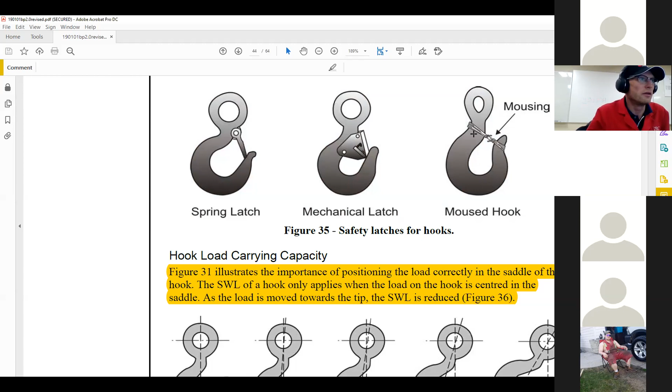Yeah, interesting. Yeah, sometimes necessity is the mother of all invention. It's a saying that they used to say, right? If you need to get something done, you figure out a way to do it.

So carrying capacity of hooks.

Oh, someone needs their microphone. I don't know who it is. Oh, there we go, it's gone. Thank you, whoever it was. Appreciate it.

If you're on headphones, it's probably not as bad because then it's not a speaker playing the sound and picking it up on the microphone. But yeah, if you're playing on your speakers or anything like that, if you leave yourself unmuted, then it'll start feedback and stuff like that.

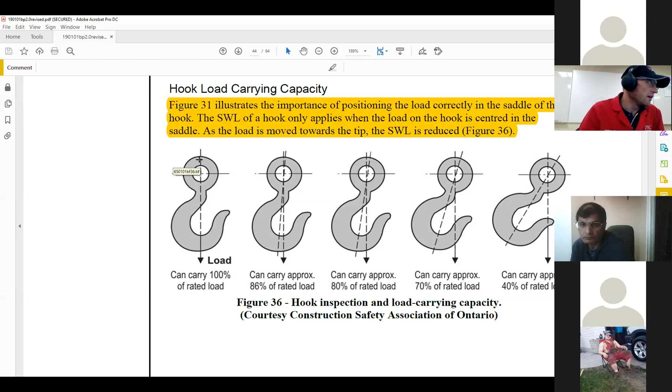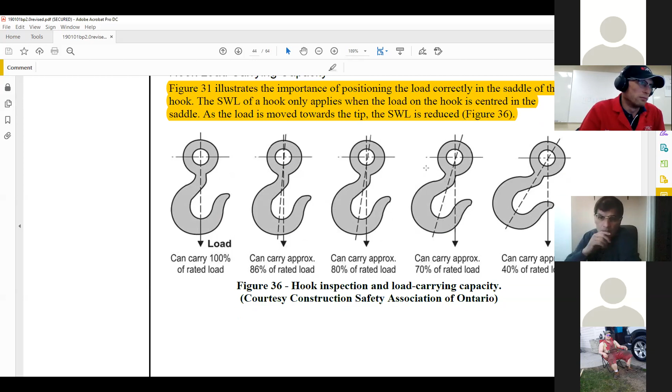Anyhow, so at the perfectly straight up and down where a hook is designed to be in its perfect world, it can carry 100% of the load. And just like our sling, as that angle starts to get smaller, or in this case, as you start to get any angle, we can say here's an angle forming right here. So as this angle gets larger, the carrying capacity of the hook drops quite significantly.

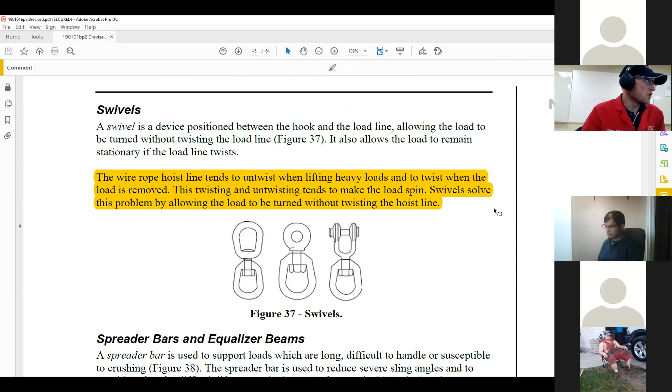When you were the person who works with the big cranes and stuff, did you have someone who was in charge of all the rigging and stuff like that? Me, a swamper. You were the swamper, okay. But I guess now I'm in charge of all the rigging and stuff like that because we have to unload it off all the trucks and get it sent out once a year for crane inspection and rigging inspection.

Oh yeah, okay. So we'll do the rigging inspection usually around CVIP time. We'll do the CVIP and the rigging inspection and then get the picker inspected and get all that stuff all done right up.

But back in the day when you had to look, when I was a swamper, you'd always look up over your stuff before and after you use it. And I'm guessing if you did some of that, you've probably seen this book before or heard of it.

You guys seen the IPT crane and rigging handbook? Yeah, I've seen it, but that's more for the guys. I'm pretty sure they have to have something like this in their truck at all times. Yep, and they'll have their specs book too, and they pull all that stuff out every day when they go out to work. If it's Shell, they'll definitely be pulling that out in the morning. They get them to test everything, run their crane up and down, and then inspect the rigging, make sure all those metal tags are on all the lifting equipment. That's the big thing. If any of your lifting stuff doesn't have one of those tags, good luck, you're probably getting sent home. Oh yeah, definitely, that's pretty commonplace practice.

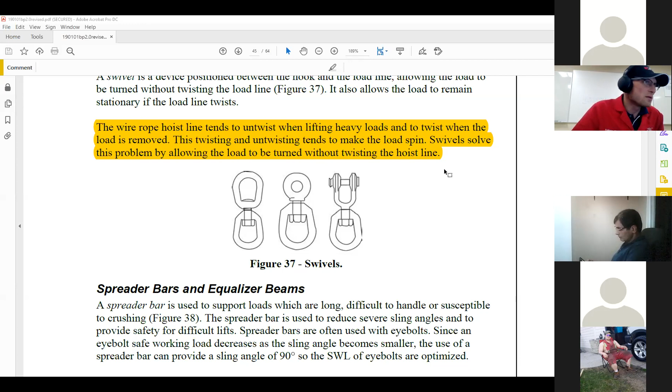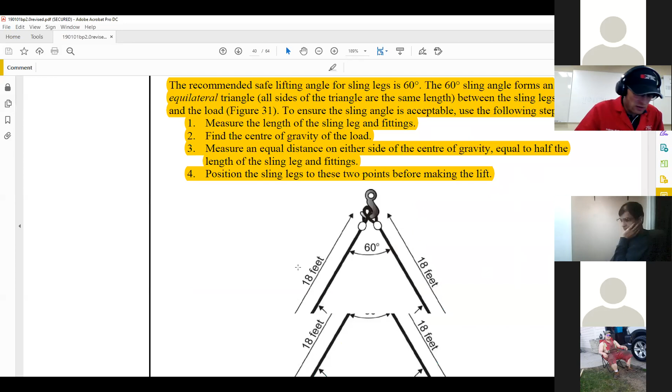What often happens is because of that twist, as you're lifting, the load is going to want to rotate. We don't want our loads rotating or swinging. So what you would use is something like this, a swivel, so that as the wire wants to twist, rather than the load moving, you could have a rope holding the load steady, some sort of guideline. Rather than that spinning, there's a pivot point inside of here so that the wire rope can easily untwist without affecting the load.

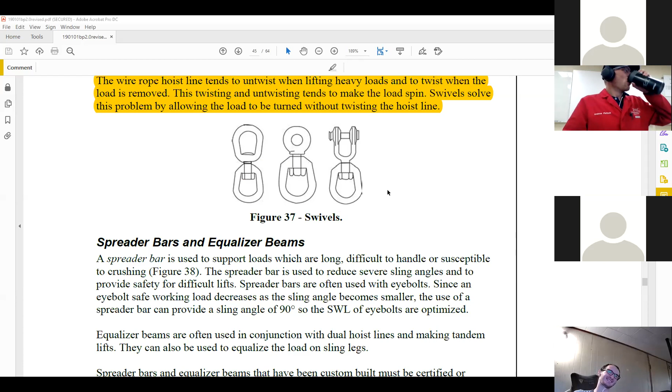There's a joke there where you get your swamper to come and say, yeah, you need to tighten up that hook, so they'll get them to spin that swivel to hook it on. Spin it around and around, and you get your swamper spinning and spinning until they realize it's not threaded. I'll always say, hey, the 45-ton hook is falling off, you got to tighten it up, and then you get them to spin it until he figures it out. I've seen those videos before, it's hilarious.

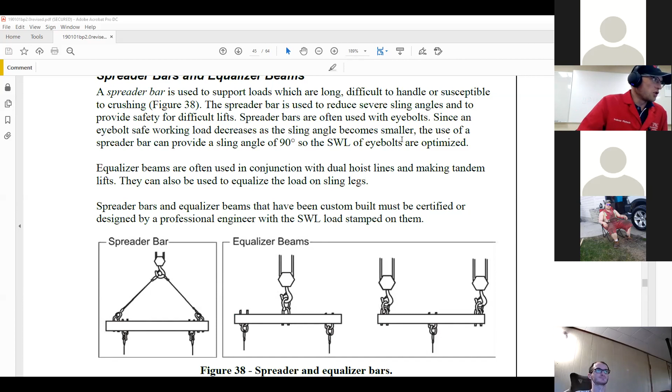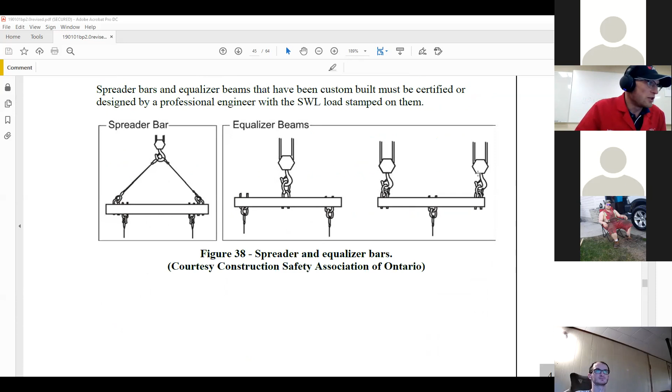So yeah, spreader bars and equalizer beams. We talked about a bit of those before, why we use them, different ways to set them up. They just make lifting loads a lot easier to hook up a nice way, adjusting where the center of gravity would be, spreading out. For instance, this one here, spreading it out so you can have a nice angle. You don't have any angle, right? You're lifting straight up and down, which is always the best.

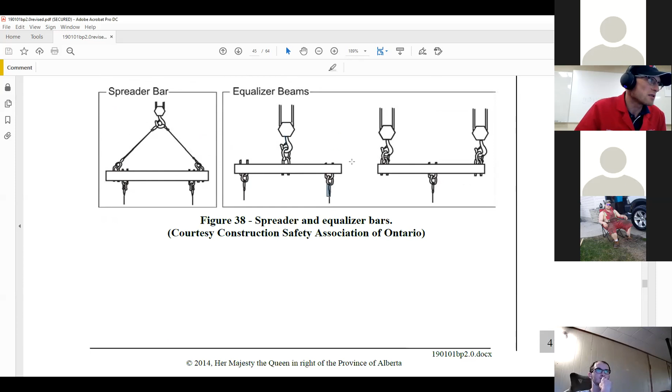The shop I used to work at, they had the spreader bar with the two cranes, but then also the two eyelets on it. Yeah, so the same spreader bar can be hooked up in multiple different configurations. Yeah, and that's how you want to do it. You want to try and get one device that you can use for as many different applications as possible. Yeah, these things aren't cheap either.

And you can use two spreader bars, two trucks, double. Yeah, any kind of configuration.

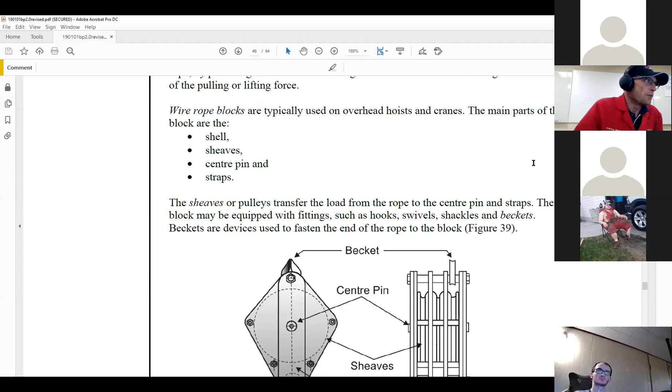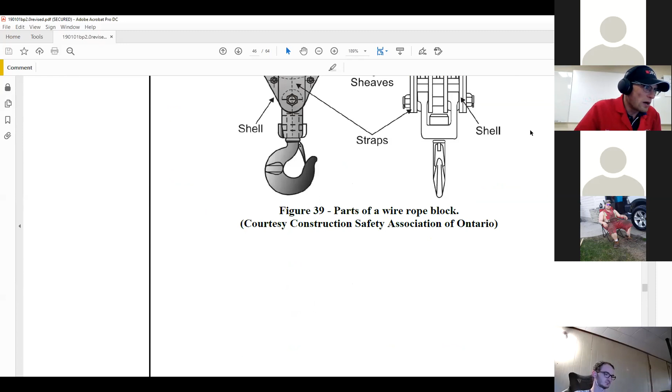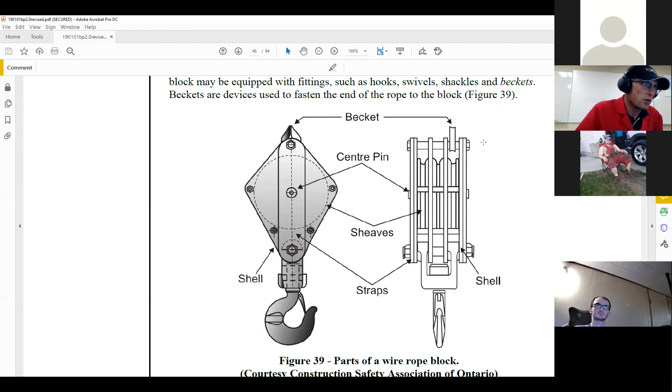So wire rope blocks, you've probably seen these if you've been working with cranes and winches. There's a wear point and an inspection point for those as well. Some people assemble and disassemble tower cranes, and part of their job is pulling these apart, inspecting them, maintaining them, and preparing them. They're fairly simple, just a bunch of sheaves, like wheels, put into a block that's bolted together with a pin that they all pivot on.

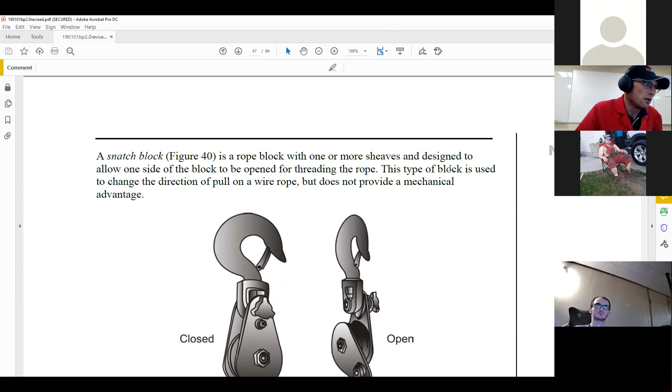Just like with anything that pivots, there's potential for wear. So that's where it's going to show up.

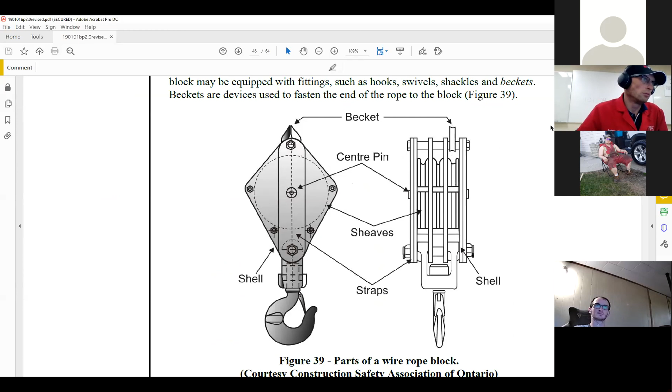The cool thing about the ones with 3 wheels on it is, depending on how you tie your winch line up, it can be rated for a lot more weight. Depending on how you rig those up, you can be lifting a lot more than you're used to if you switch it up. It's just a matter of mechanical advantage.

Tow truck drivers use these too for the same reason. So let's say I have a 100-pound weight here. If I just had one string pulling up here, not wrapped around, just one eyelet pulling up, how much weight would that string be pulling?

100 pounds, yeah, absolutely. Now if I took this block and had a line coming in, going around the sheave, and then coming back out and up, how much is each one of those taking? They're each taking 50 pounds. But if each one of them is rated for more than that, now I could lift up more.

That's how you start adding mechanical advantage. You can go up to like quadruple what you're lifting. See how with 3 wheels you go around and come back down? Some of the guys' pickers are rigged up like that. It's awesome. Essentially, if I'm lifting this 100-pound weight using all 3 of these, the weight on any one of those strings is only about 30 pounds.

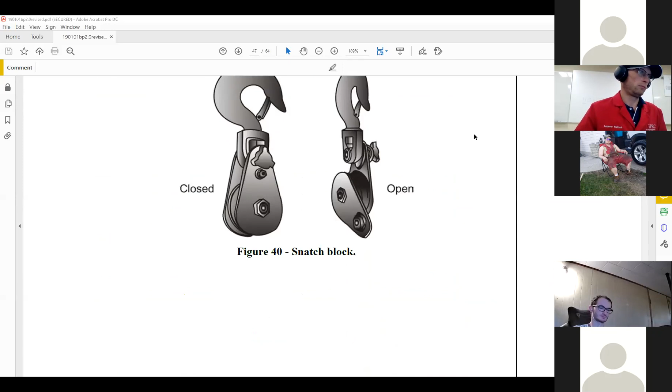It's just like pulleys, and if any of you remember from high school, this is where physics actually applies to real life. The only thing is you can't just lift any amount of weight - it's more about keeping your winch line in good condition, because the crane can still only lift 45 tons. It's just the way you rig it up, depending on how much tension your line's taking.

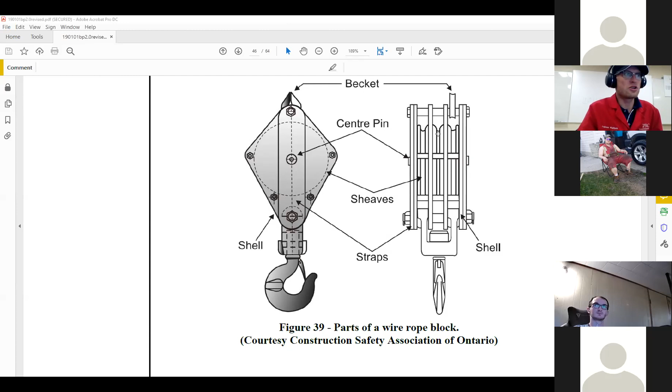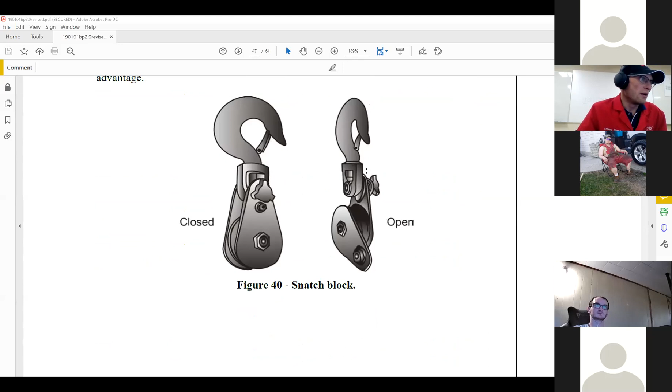Yeah, exactly, it's all about that. You want to put as little tension on the line as possible, because everything wears out. This is exactly like that, just a bit more temporary. If you've ever used a come along, you've used something similar to this - it's just a chain hoist pulling horizontally instead of vertically.

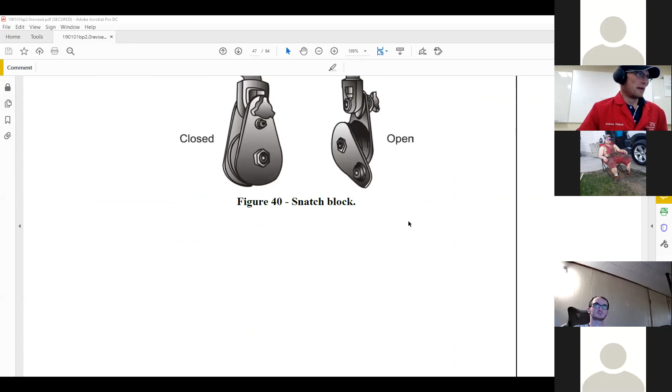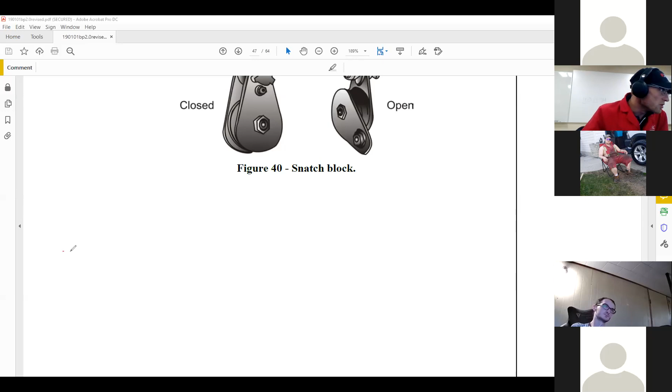So this winter - or last winter, I don't even know, before or after New Year's - I went into the ditch. Here's my truck in the ditch, and here's the tow truck. He took his winch line and hooked it up, and he's pulling and pulling, and snow's piling up back here, and he couldn't get it out.

So what he did is he took one of these snatch blocks, and took his line that was coming out.

So his line came out. He put the hook of the snatch block on the back of my truck, and then he ran the cable around here and to here, to the back of his truck.

So he doubled it. Now his winch, let's say it could only pull 500 pounds. Now the winch, because of mechanical advantage, was pulling 1,000 pounds. So he had more mechanical advantage, and that's how that works as well.

Same idea, right? This is just a crane turned the other way. When you're pulling something sideways, it's the same as pulling something straight up and down, just a different direction. It's notable that the pull between the two trucks is the same, just the actual pull the winch is required to do is halved.

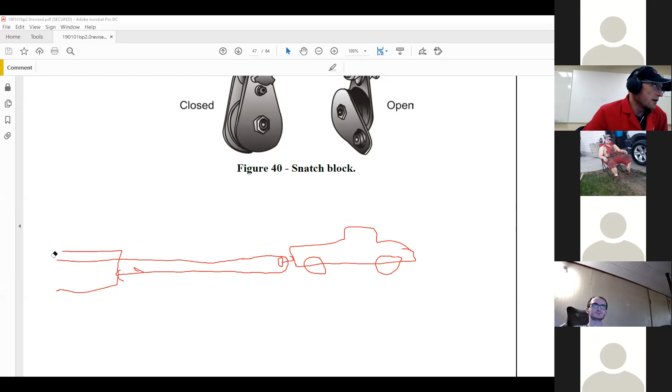Yep, gotcha, I see what you mean. Basically just taking the strain off the cable itself and the winch. Rather than having the winch run at full bore to pull me out, he has it run at 50%, and it's still giving that same pull on my vehicle.

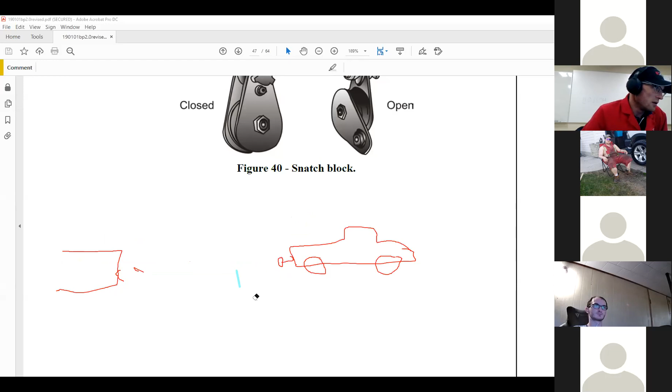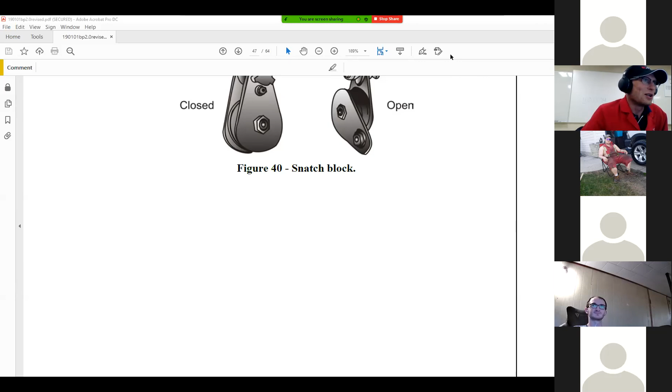Yeah, that's just like in big trucks too. On bed trucks, you'll see what's called a snatch block, which is pretty much exactly what this is. I mean, what he was doing is the same thing as a winch bed truck would be doing picking up rig camps. It's the exact same - it's just instead of pulling my truck out of the ditch, he's pulling a shack onto his bed or whatever.

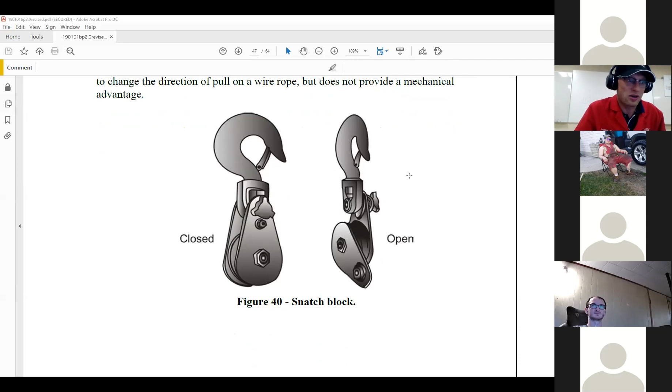Once I got a 45 ton, we had it buried - probably almost to the walking deck on the bottom. We grabbed our biggest bed truck, put it on its side, had the snatch block coming out the side of the bed truck, and we were literally plowing this 45 ton picker through mud, like it had been buried 5 feet under. Our bed truck's tires on the other side were probably almost 3 to 4 feet off the ground, but we just had to keep coming back down to the ground and then start pulling again and go up 4 feet.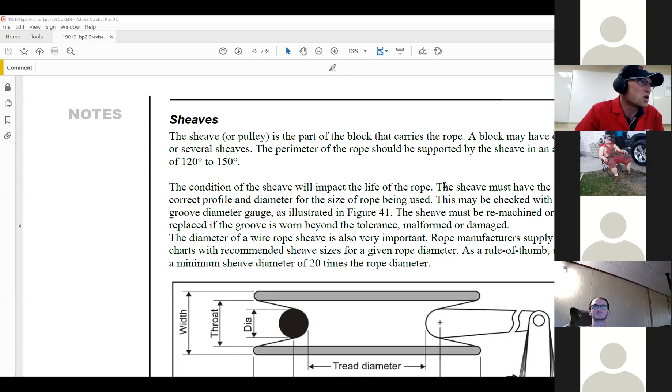It was insane. Yeah, I've seen some very insane things. If any of you have good videos of fun things you've done, please send them to me - I always like to see what happens out there at work. I love work so much I could watch people do it all day long. That's why I got into this job.

Anyhow, so sheaves, the pulleys themselves - they do have wear indications. This is terrible that it's sideways, but there are some wear indications on here. Manufacturers will give you the specs for this, and you'll be able to measure it. Are any of you rebuilding sheave blocks at all, or inspecting them or anything like that?

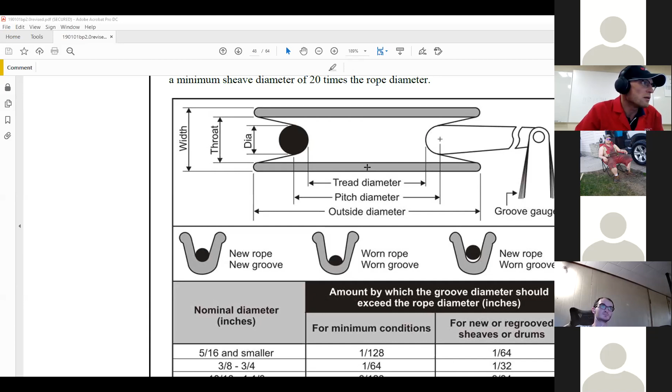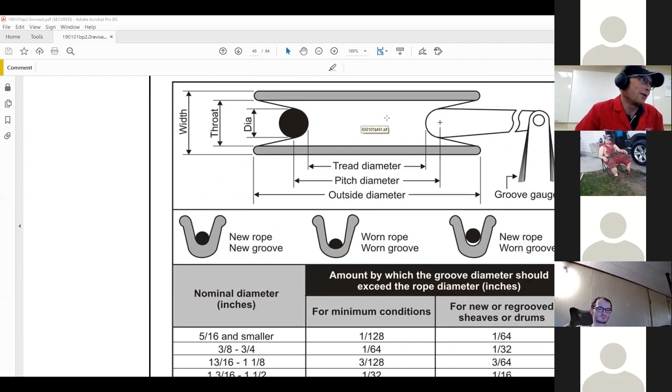Anybody know? Sometimes, depending on where you work, you might be tasked to do this. This is a heavy duty mechanic thing. Yet again, you'll need to know what the specs are before you can say something's broken or not - you need to know how to determine that, or if it's worn out or not. Broken is a little bit easier - this thing has a big crack right down the center of it, and it's broken into 2 pieces. I'm fairly certain everyone knows that isn't how it should be.

So, if you're just measuring for wear, you're going to need to know what a new one would be.

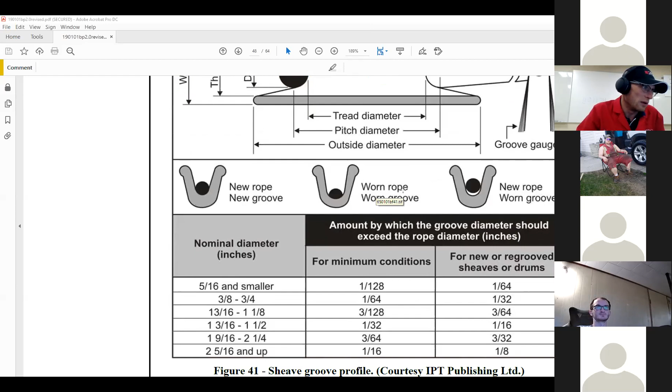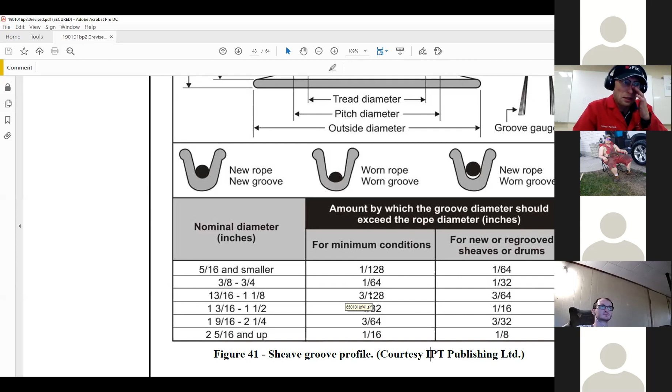And here's a chart. Guess who made this chart? IPT Publishing. So this is out of that rigging and load carrying manual that I showed you. That's where this comes from. There are so many charts, specifications and measurements in there, more than you'd care to remember ever in your life.

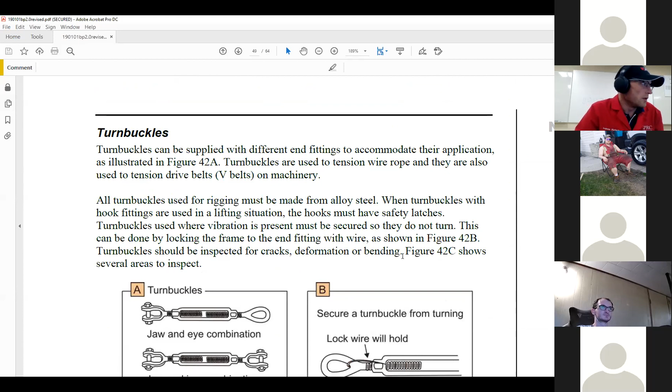Turnbuckles. You see these in places. They need to be rated properly. They can help you with lengthening and shortening lengths. Where else have you guys seen these?

We use them on our flip tops for the cables holding the tarp. So, like, to put tension on the cable. Yeah, okay, that's a common place where they're used.

They're basically a boomer, they kind of look like strapping down boomers, equipment. You're talking about a boomer, like a ratcheting boomer. They're just like this, but they have a handle with a ratchet type of device in them, and you ratchet it to shorten it.

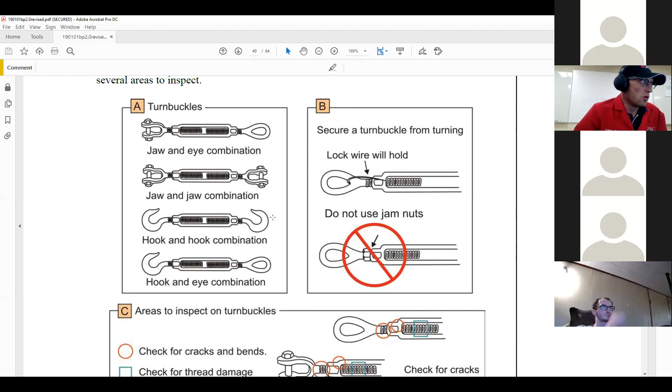Okay, good. There is a different type of boomer, called a cam boomer. They used to be used a lot, and they're so dangerous now. Yeah, they're illegal now for loads. You have to use a ratcheting boomer if you're going to use one. But yeah, that's very similar. Cam boomers are definitely not legal to use for loads. Nice, okay, good to know.

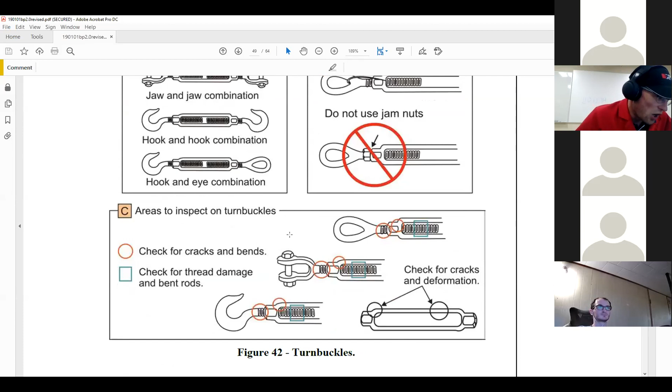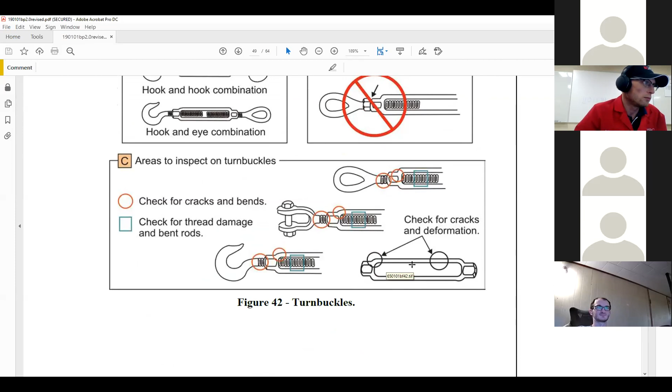As I've seen, I call them the cheap dentist, because if you need to remove a tooth, you buy one and give it a couple taps. They're just scary because when they snap open, you're like, holy shit. I've never really used them right, so I wouldn't know, but I always hear the horror stories.

Do they have to be wired down, or as long as... We've got these wire clips that hold the handles down when you're in transport. Okay, so there are clips on them. The newer ones have clips. Do those clips have to be there, or can you use an old boomer?

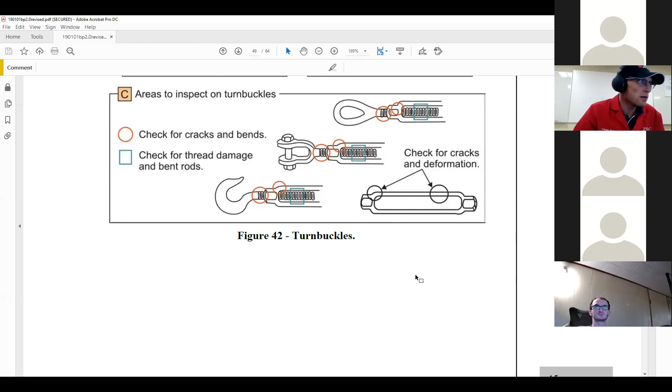I used to hold equipment down with old boomers, and then you'd put wire on it to hold it closed. They have to be wired. You can use an old boomer, but you have to use the wire. The new ones come with clips. I was going to say, if you were going to use them, wire them. I still used it on things like transmission jacks. This is just a little tiny one, but I still used them, and it wasn't driving down the road. I have seen them used for equipment and stuff like that.

These, for lifting, need to be engineered, and they're an easy way if you don't have an adjustable sling. So if you have one of those things where you don't have a grab hook for shortening the length of the sling, this will work just fine for that too.

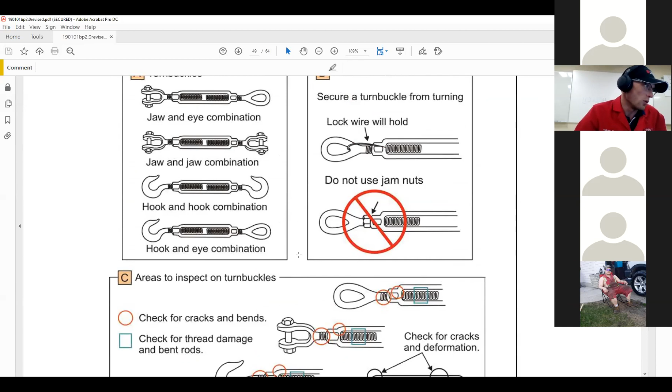So this is all about crane operation and using a crane. Any of you with a crane over 2,000 kilograms should have taken overhead crane training.

I've taken it. Yeah, is there anyone who hasn't? I guess me, because I never had a crane in any of the shops I was in. Okay, sounds good. Well, we do have some cranes in our shop as well.

They aren't that big though, so we'll be okay. I've seen them, I've been in the shop already. And for us too, for first year, we don't really use the cranes that much. Very, very little. So we'll talk about that as well.

There's a nice cantilever crane in the shop, isn't there? No, wait, no, it's two just boom cranes, three boom cranes. I thought there was a swinging cantilever one downstairs by where they used to take the final drives out of the cat. Oh yeah, okay, the big yellow one. I know the one you're talking about. Yep, there is that one.

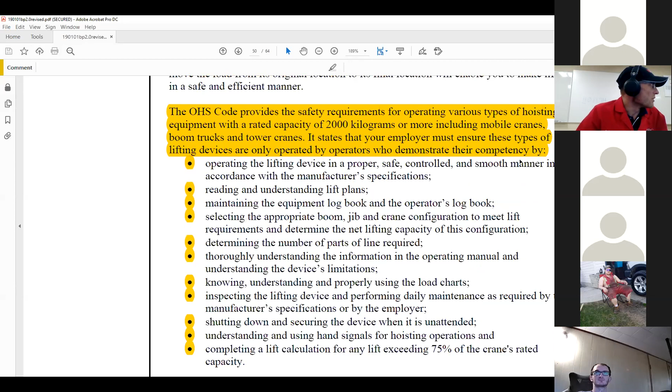I can't even recall what that one's rated for, but it's not as much as you'd think. No, I think for some reason it's only a 3-ton crane at the most.

I'd have to look, we'll find out Thursday when everybody's here together. We'll take a look at the cranes. It shows you how much I lift things around here, because I don't think I've ever even used the cranes in this shop. I've had no need to.

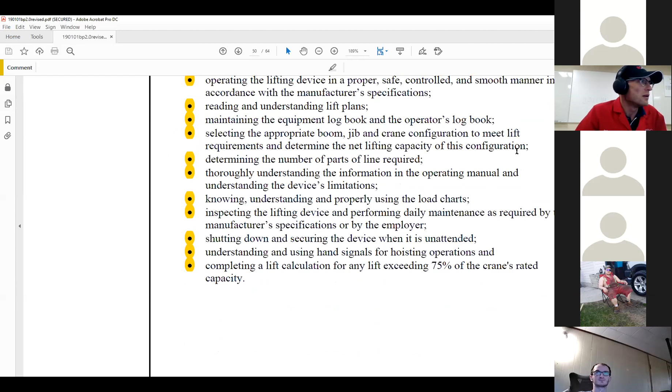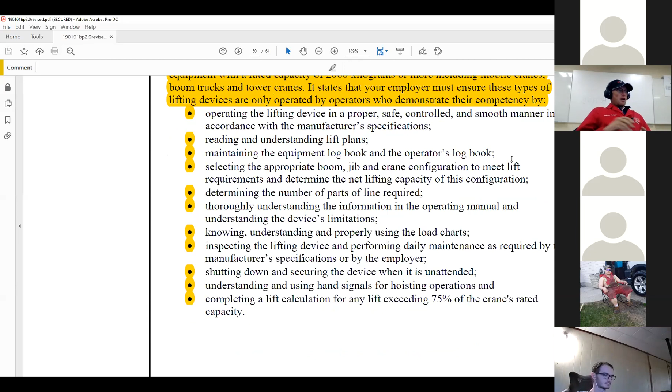Some things to consider when you're lifting, if you haven't had training or are just using a small crane, if you don't know, always ask somebody. One of the things Clint and I like to talk about is asking questions. It's much better than trying to explain why everything broke and needs to be picked up off the floor.

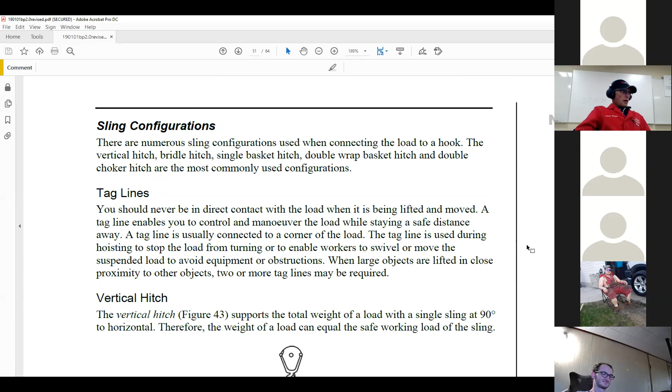Okay, so always ask a question if you're unsure how something works. Now different sling configurations. I was talking about basket load, and how the slings have a tag label on them that tells you the different configurations and their weight ratings. Different ways you rig up a sling will change their weight rating or what they can safely lift.

Taglines, that's what I was talking about. You have a nice tagline on there so you can control the spin and make sure as you're moving a unit it doesn't get out of control, because you never want to be underneath it or in direct contact with anything being lifted and moved.

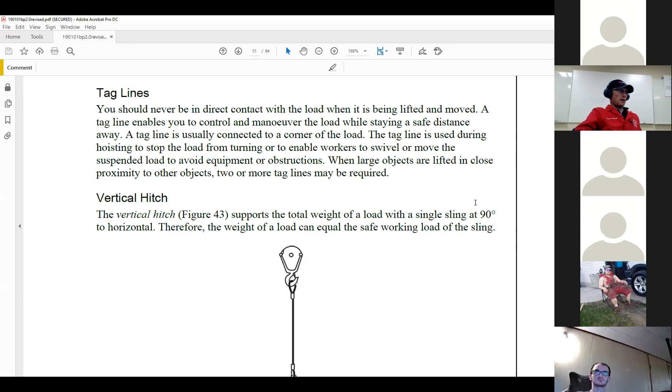So you need a nice tagline on it. Taglines are good. That reminds me, you like to keep most of it wrapped up in your hand when you're holding the tagline.

I remember I had to chase it. He started swinging too fast, and I had to chase it, and I dropped the whole wrap around my hand, and I stepped into it, and he lifted up at the same time, and it coiled up my leg and flipped me upside down, and I swung out under the load. It was insane. Yikes. It all happened so fast. I didn't even know, I just got flipped right upside down, and I was like, whoa, what's going on? But it was funny.

So that's a perfect example of how quickly things can go south. Fortunately it sounds like you were okay. It was just a big scare, like, holy crap, how did I end up upside down? But it could have been that quick where, oh, what just happened, and you're dead. It's unfortunate, but that's just an illustration of how quickly things can happen. It's so quick, you don't even see it coming.

At the shop I used to work at, I saw a coworker moving a small hopper, trying to set it down on this circle. Can't remember exactly what it was, but he's trying to set it down. He didn't have a tagline on it, and he was trying to push it with his leg underneath the load. I had to go stop him. Yeah, you don't do that. All he had to do was tip down, and he would have pinched his leg off. It can happen really, really quickly, and there's no going back.

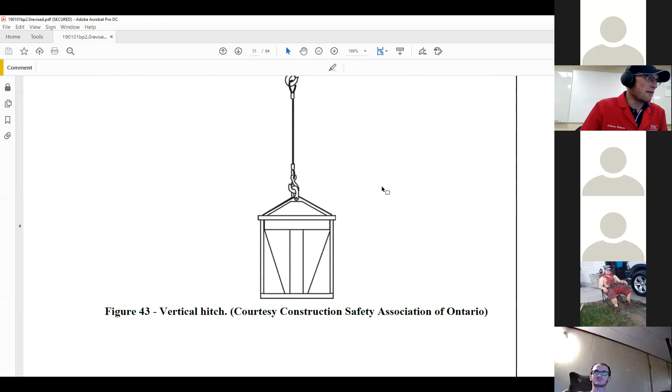Absolutely. Staying out from underneath the load. For anyone who has questions about it, you should never, ever, ever for any reason go under here, where it says courtesy Construction Safety Association. You should never be in this area while this is hung up. And now they're getting to where you shouldn't even be touching the load. We've all done it, obviously, just sticking out.

But they're trying to build equipment for swampers, like these shovel things, so you hold it with this kind of shovel thing or a hook thing. You can grab onto the hook and push and pull and try to do everything, trying to mitigate touching the load or being close to the load at all times.

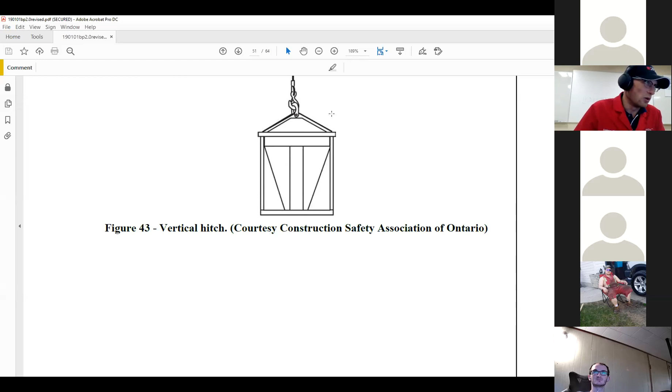Exactly, you don't even want to be close to this. If this thing falls over, who's to say it's not going to tip one way or the other as soon as it comes down? If you're standing right beside it, you might be in the way it decides to tip over. But under no circumstances ever be underneath a load that's suspended. So if you need to be under something, you have to block it up, put it on something solid.

Always, always, always, always.

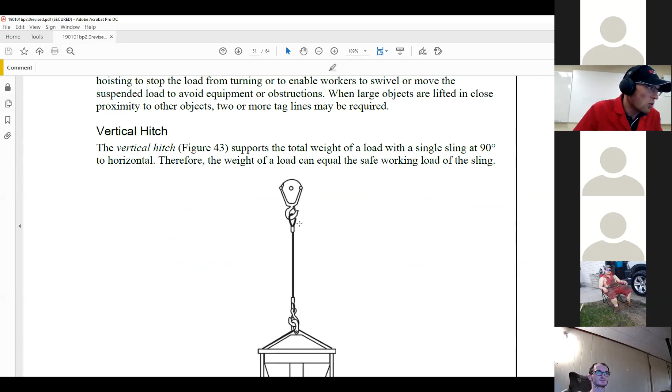So, the vertical hitch, straight up and down. We can see this is a wire rope sling, but it would work the same with a chain sling or a nylon sling. Straight up and down, one eyelet on the hook, one hook on the load. We're not really talking about this angle, this spreader, this adapter, just this sling here. So whatever this weight is, this sling is taking that full weight. It's at 90 degrees, so the whole weight is on the sling, okay?

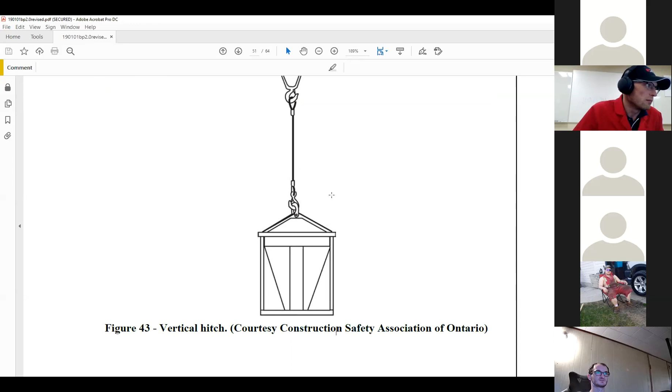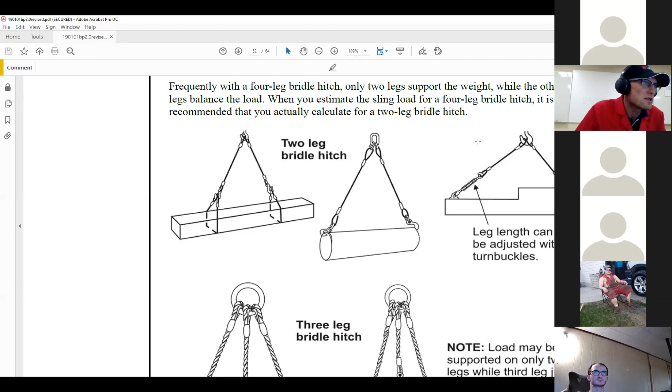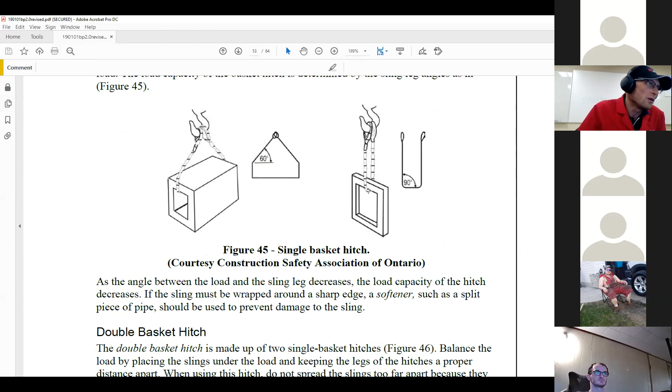So a single basket hitch, really nice and simple to use. Remember, we want to try and keep that 60 degrees and not go below 45 or 30 degrees they talk about. In this instance here, you'd be at 60 degrees, perfectly safe to lift like that. In this instance here, ideally, this basket hitch at 90 degrees is perfect, the best way to lift something up.

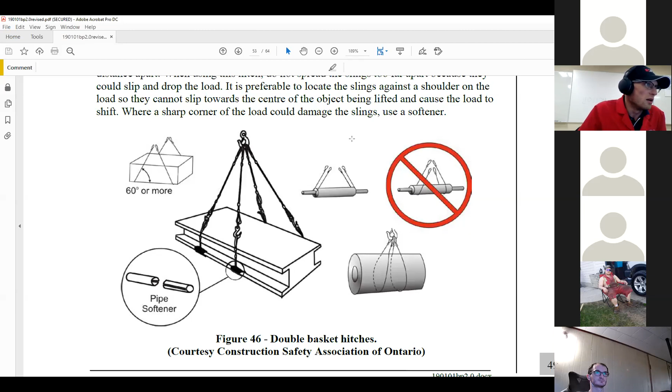Is that possible all the time? No, it's not. A lot of the reason is because of the way loads are. For instance, you couldn't put a single basket hitch on something like this unless you went through the hole in it. Regardless, to go around the way they're doing it here, you're right, a single basket hitch would never work.

Double basket hitch, well, this way doesn't look like it would work very good either. Does anyone know why this wouldn't work? Might slide to the center. Yeah, both of these slings will just pull right into the center, and then you're gonna have the same problem. You'll have a single basket hitch, and it's gonna tip one way or the other.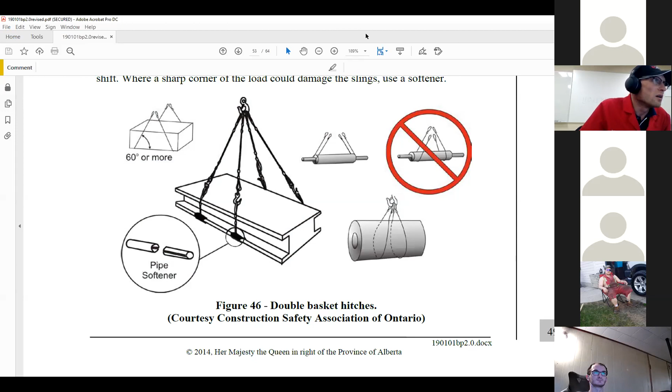So you'd want to put it somewhere like this, like this one here, so it's held in place.

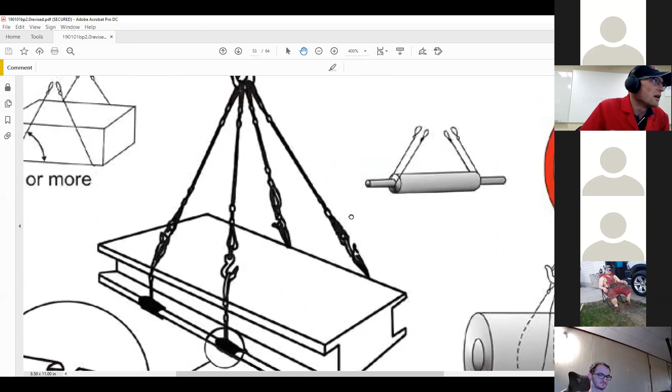Or do it with a choker, so that it holds in place and it won't slide, okay, that's the other way to do it. And a double wrap choker, similar to what we're talking about, will try and hold these solid as well, okay? And it shouldn't slide because the weight itself is pulling this tight, okay?

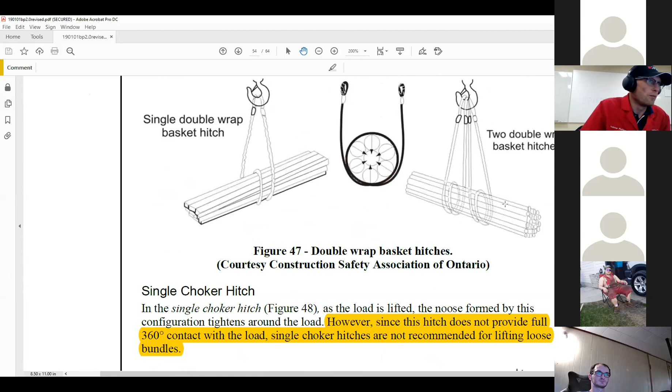Here we are, a single choker or a double choker, okay? This is what you're talking about, right? Well, we call them chain slings, but yeah, pretty much. Or sorry, pipe slings. And usually you use 2 and you make that 60 degrees. So you do something like this, but we try to make 60 degrees with it, or try to keep it

Spread out somewhere. Yeah, this one, because you know it's hard to find the center. So doing it like that in theory is good, but sometimes when you're looking at 60 feet of pipe or whatever, 20 feet of pipe, it's kind of tricky to find the middle. So you want to kind of have them spread out so you can get away with it tilting a bit. Yeah, exactly, you're absolutely right.

Like this, it looks nice. If this was 5 feet long, that's fine, that would probably work just fine. You go about to the middle, you don't really have too much weight on either side. Put a tagline on it and hold it stable, really easy. But yeah, if this is 60 feet long, good luck. Yeah, you see that on the pipeline a lot, doing this on pipeline a lot, moving pipe and stringing it out.

I can imagine, when you're putting it in place for the fitters to get in position before it gets welded, the picker truck is just driving along with the pipe on the trailer, taking one off, putting it in place, taking one off, putting it in place. Pipe fitters will use nylon, but when you're running pipe down the hole, you'll be throwing probably 300 joints, picking 20 or 30 at a time, and just throwing them on the pipe racks for them to run down the hole.

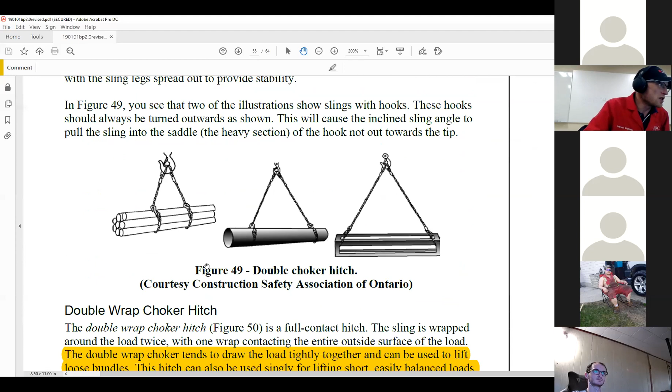Oh yeah, okay. Different situations need different rigging, right? So this is probably a little bit more similar to what you were talking about, hey?

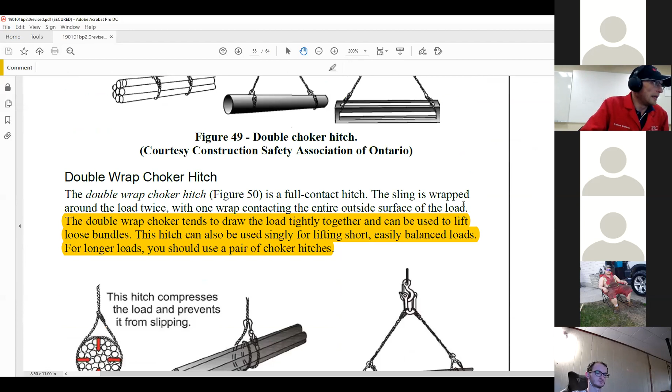Double choker hitch. Oh yeah, 100%, that's exactly what it is. Perfect. And then a double wrap choker hitch.

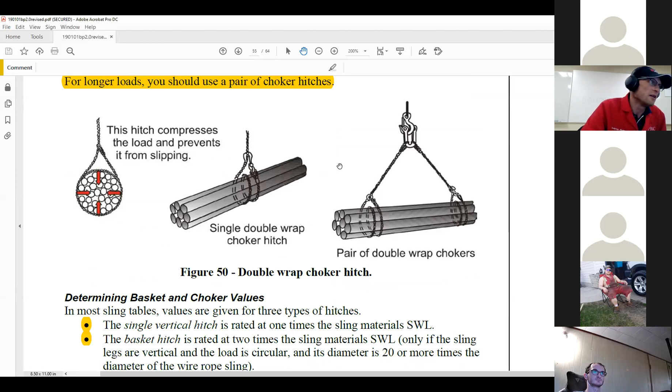Now, do you need to know the names for all of these things? A lot of these names aren't necessarily standardized in a way that, when they ask you to hook something up, your boss is going to ask if you did a double wrap choker hitch on that. They're just going to ensure that, according to their best practices, it's hooked up safely. So it's good to know all these different ways so you know the different options you have, but as for exact terminology on some of this stuff, if you don't remember, it's not the end of the world, okay?

So now we have to determine basket and choker values. It says in most sling tables, almost all of them, any nylon slings I've seen have it, and almost all the chain ones too. So it'll give you for a single, a basket, and for a choker hitch.

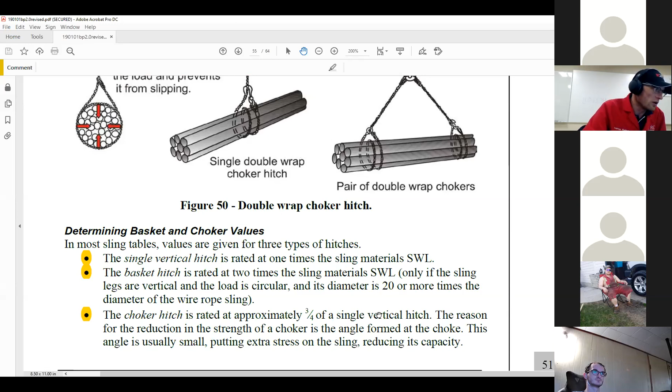All right, crane signals. Who knows the crane signals? I do. Yep, all right.

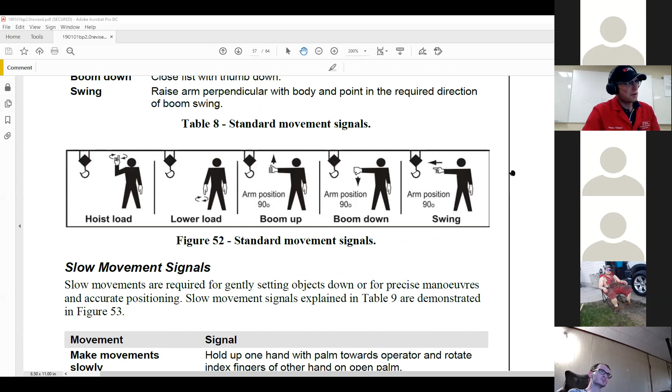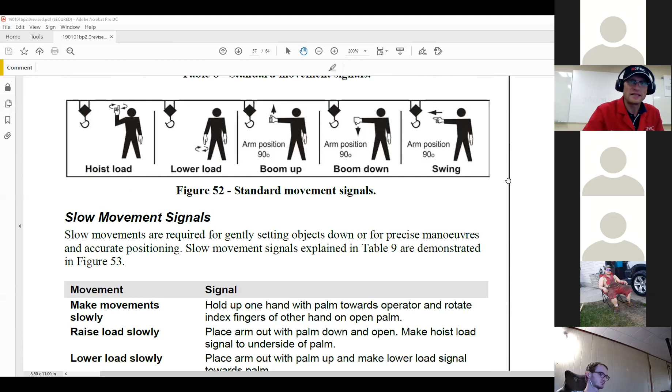Chances are in our shop here, while we're at first year, we probably won't need any of these. We're going to be close enough, quiet enough where we can talk to each other. Chances are you won't even need a spotter telling you what you're doing either. You'll be able to hook something up, lift it, move it, put it down, and see the whole operation yourself.

Alrighty, and then for other riggers, depending on what you're doing, like depending if you even have a boom that can be extended or not. So if you use different signals at your work, continue to use those signals. You don't need to change anything.

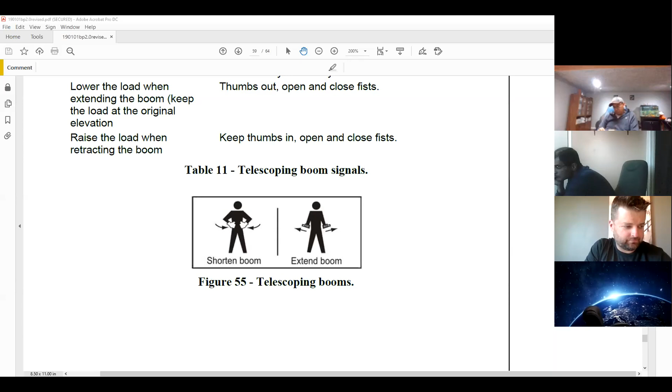Is this what they show you for shortening and extending booms? It's kind of like that, it's more above, I guess I can show you. It's nothing fancy, but basically it's just boom out, boom in, and you want to hold them up over your head, not below your waist. Oh okay, gotcha, you want to be high up and visible.

Yeah, and then usually they said that's slower, you know, when to do something slowly. Usually you do this to the picker operator, you go like this, just a small sign. Be like, oh, just like this, and then you start doing your normal signs again.

So again, if your work is doing something and that's their best practice there and it works, don't let me tell you you have to change something because this book says so. That's not necessarily what I'm here for. This is just a bit of general knowledge and awareness for somebody who's never dealt with anything like this. There are some standards just to have an idea of what someone might be saying, okay.

But if you don't know for sure, hey, is this a sign we actually use for extend boom here, please go ask someone before you're telling the crane operator where you need them to be moving stuff.

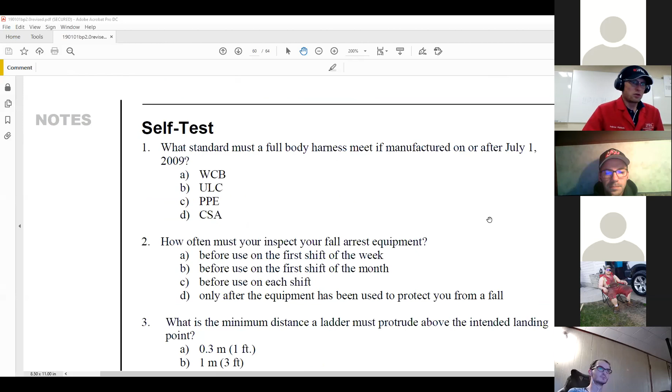Alrighty, so we can do this self-test now. Take 10 minutes, get this one done. I think this one's very, very similar to the new one, so we shouldn't have any issues, okay. And then we'll quickly go over it, and then we'll finish up our other two ILMs.

You want a photo of this one too? Yeah, sure, let's do that. It seemed to work yesterday.

Hey Andrew, so are they just texting you your number? Because I missed that, I was at the library. Yeah, it is my number. You have my... oh. Hey, I do not, I don't think. I probably could find it in an email. I'll just put it in the chat. Oh okay, perfect.